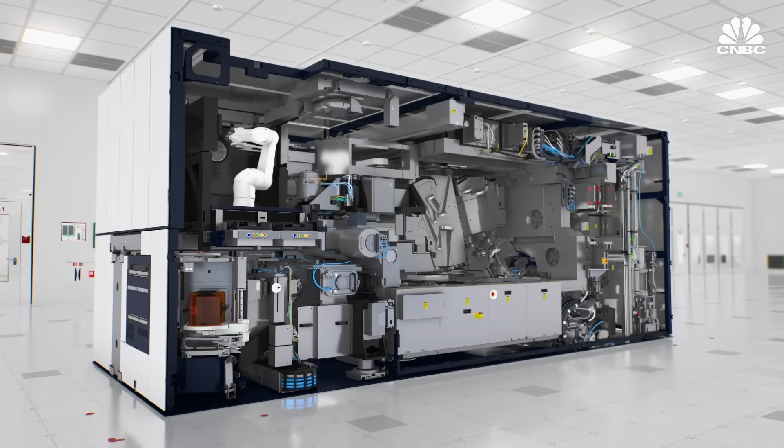ASML has a monopoly on the fabrication of EUV lithography machines, the most advanced type of lithography equipment needed to make every single advanced processor chip that we use today. And this company is one of the most extraordinary organizations in the world.

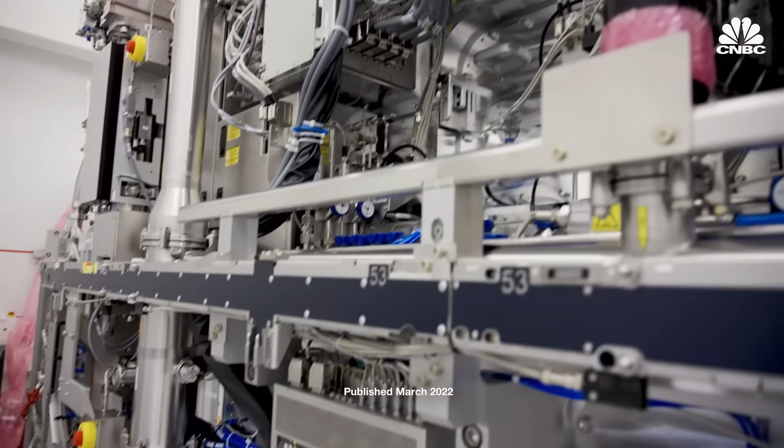At the center of this big factory in the Netherlands, in the midst of a months-long assembly process, there's a revolutionary machine that the whole world has come to rely on. You could see an EUV machine right behind me.

The size of a city bus, but working with atomic-level precision, these EUV lithography machines are the most expensive step in making every advanced microchip that powers the modern digital age—found in data centers, cars, and every single iPhone.

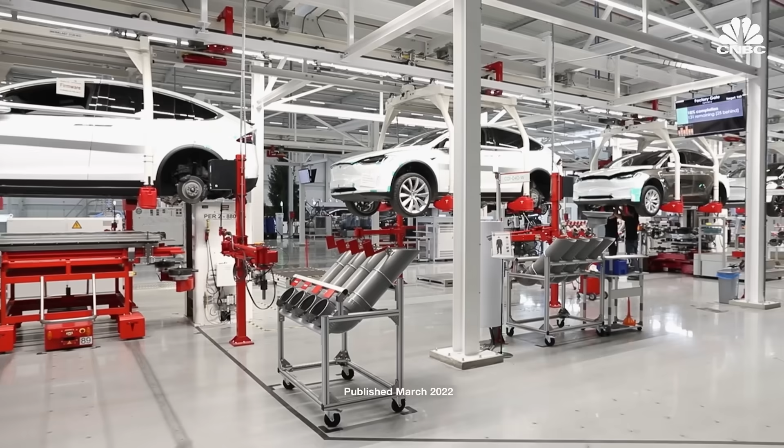We are the only provider on the planet of this critical technology. These machines are the only way to print minuscule designs on these chips. They cost up to $200 million, and they're only made by a single company, Advanced Semiconductor Materials Lithography, or ASML.

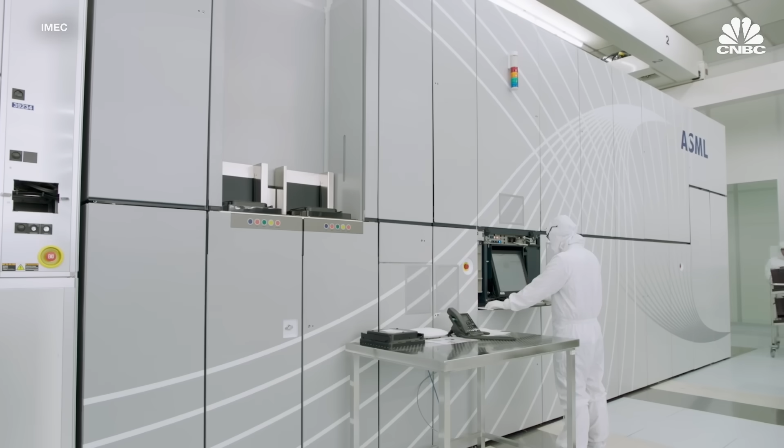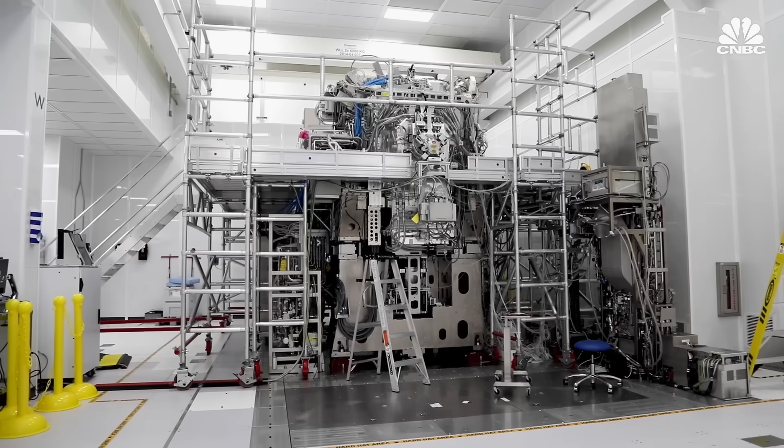Today, ASML has a monopoly on the fabrication of EUV lithography machines, the most advanced type of lithography equipment needed to make every single advanced processor chip that we use today. And this company is one of the most extraordinary organizations in the world. The machines they produce are each among the most complicated devices ever made.

In the midst of a chip shortage that's caused back orders of everything from PS5s to Teslas, the need for ASML has never been higher.

Its stock has skyrocketed since 2018, while its three main customers, chip makers TSMC, Intel, and Samsung, vie to be front of line for ASML's next breakthrough technology.

The price tag for this next machine, which promises to push the boundaries of known physics, is more than $300 million. It's so expensive that most companies cannot afford it.

While the chip wars rage on, we wanted to find out what's really going on inside the quiet company making the machines that print them all.

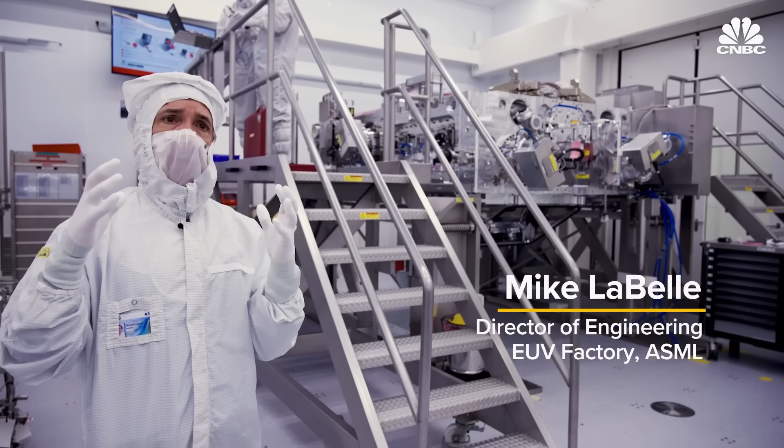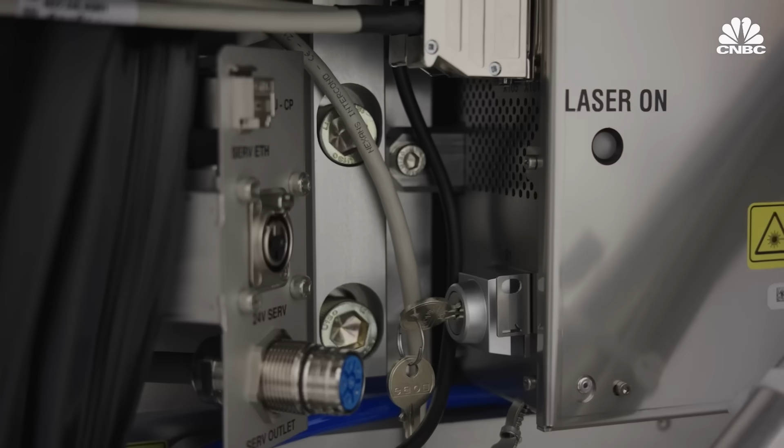This is the optical part of the machine that makes EUV possible. We got a rare tour inside ASML's clean rooms in California and the Netherlands to see how these machines use precision lasers, exploding molten tin, and the smoothest surface in the world to bring our digital age to life.

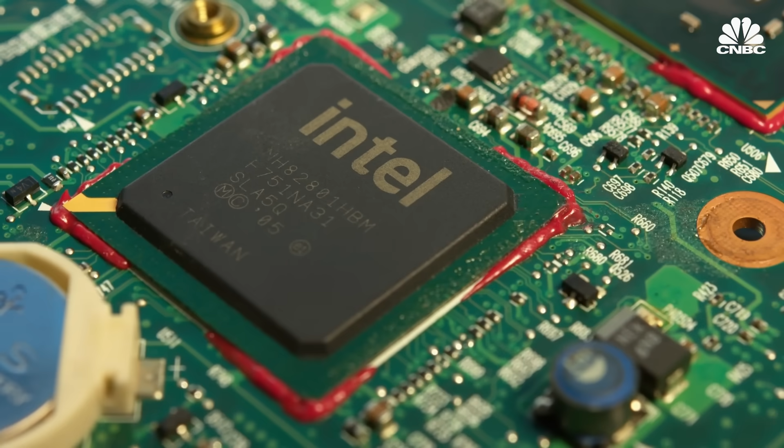ASML's crucial role on the chip-making stage has brought it wild success over the past few years, making it even more valuable today than Intel, one of the biggest chip makers it supplies.

It's double-digit growth every year, and we're not a startup. We have now 32,000 people.

Peter Wennink has been CEO since 2013, but he joined ASML back in 1999, just 15 years after its humble beginnings. It started as a subsidiary of Dutch electronics giant Philips in 1984, conducting research out of a leaky shed next to a Philips office building in Eindhoven in the Netherlands.

They were in financial dire straits, so we had no money. We were poor. And because the problems Philips had were so big, nobody looked at this little outfit out there that was trying to do something crazy, so they neglected us.

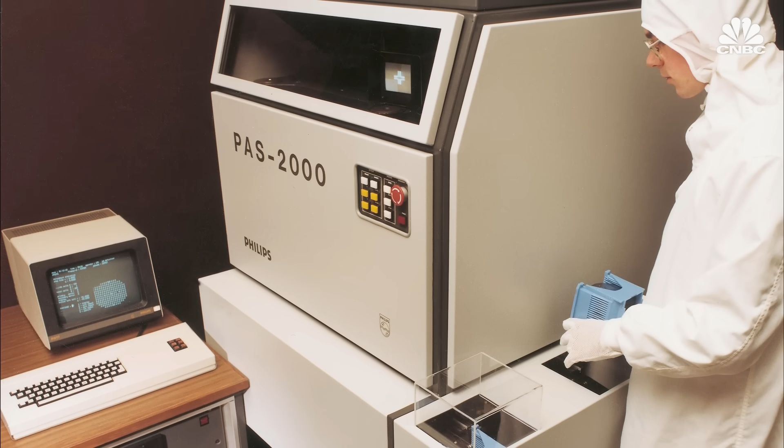Still, in its first year, the company successfully launched a first-of-its-kind machine that used precise rays of light to print tiny designs on silicon to make microchips, a technology known as lithography.

The first lithography tool really looked like a projector. There is basically a reticle which holds the image that you want to project. Then there is an optical system which is going to take this image and project it on the wafer.

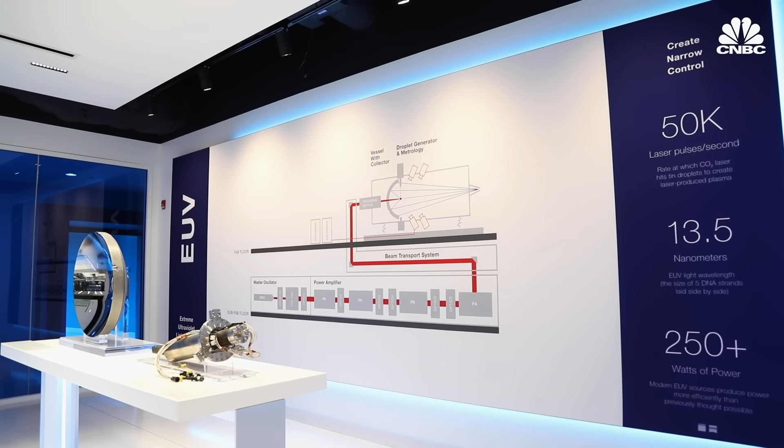Semiconductor lithography was invented in a US military lab, and for a long time, up through the 1980s, the key lithography firms were American, based in New England. Chris Miller of Tufts University is writing a book called The Chip War: The Fight for the World's Most Critical Technology. When the industry was getting ready to jump into the early stages of EUV research, none of the US firms were ready to take the plunge on what would be an expensive and risky proposition, whereas ASML was.

By 1988, ASML had 5 US offices with 84 employees, and a new Dutch office that eventually became its headquarters in Veldhoven, where CNBC took a tour earlier this month.

We're walking through the EUV factory, which is about 50,000 square meters of space with 1,500 employees working in shifts 7 by 24 to produce 100% of the EUV machines shipped worldwide from this facility.

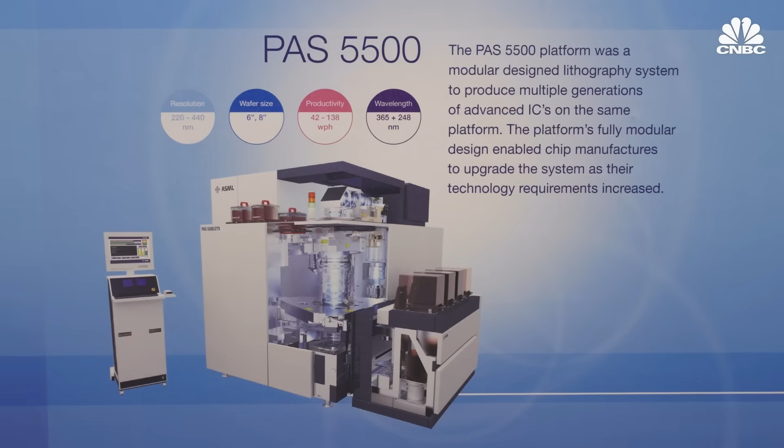With a breakthrough machine, ASML started turning a profit and went public on the Amsterdam and New York Stock Exchange in 1995. By the 2000s, ASML was acquiring California tech companies like Silicon Valley Group and various key suppliers like Cymer in San Diego, where we also got an inside look at the cleanroom where ASML's light source is produced.

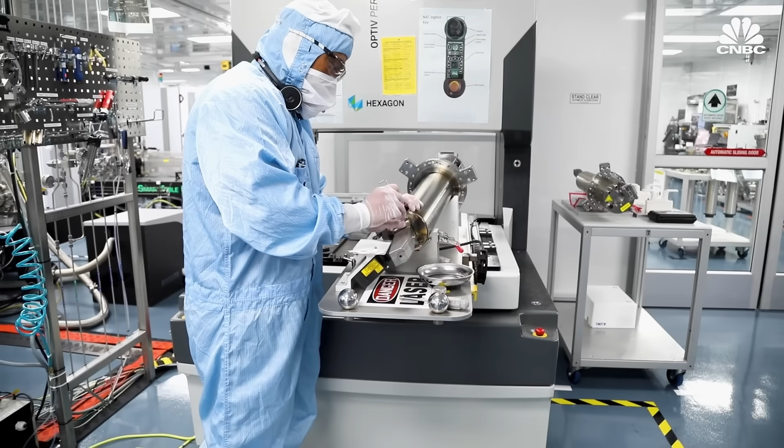So this is actually the nozzle manufacturing area where we build the nozzles. This is the piece where the tin shoots out of. That's what's going to create your EUV.

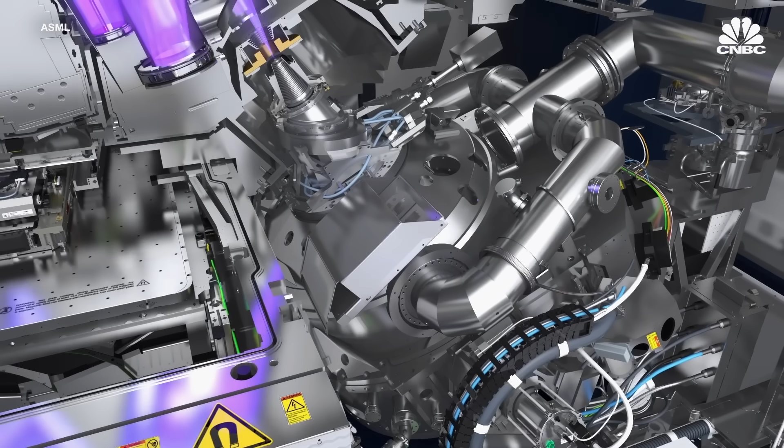EUV refers to extreme ultraviolet, an incredibly short wavelength of light that ASML uses to print smaller, more complex chips. But developing this revolutionary technology was incredibly expensive.

We didn't have the money, so we went out and found partners, which was actually the basis of the way that we built the company. So we were forced to be a system architect and a system integrator.

In 2012, ASML offered about a quarter of its shares to its biggest 3 customers: Intel, Samsung, and Taiwan Semiconductor Manufacturing Co., or TSMC. They had to accelerate the R&D for EUV, and the only way they could do this is to get their largest customers involved.

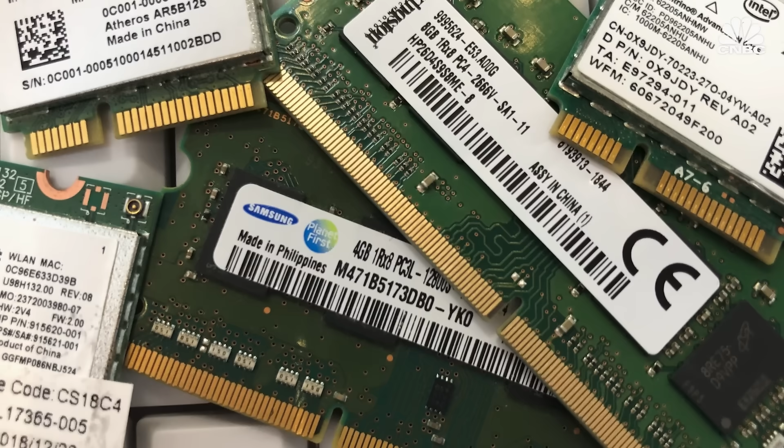And one way you can make your commitment real is to make them a shareholder. ASML is a Dutch company, but it's also a Dutch company that relies very heavily on US components, in particular for its machines, and at this point relies also very heavily on one Taiwanese customer for its sales.

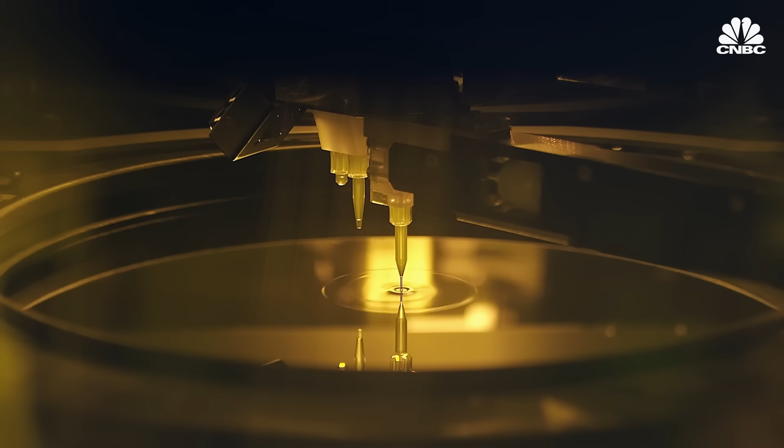TSMC made up nearly 40% of ASML's sales last year. In 2019, the Taiwanese chipmaker was the first to deliver high-volume chips made with EUV, a milestone that's kept it at the head of the pack ever since, its chip technology at least one node ahead of Samsung and Intel.

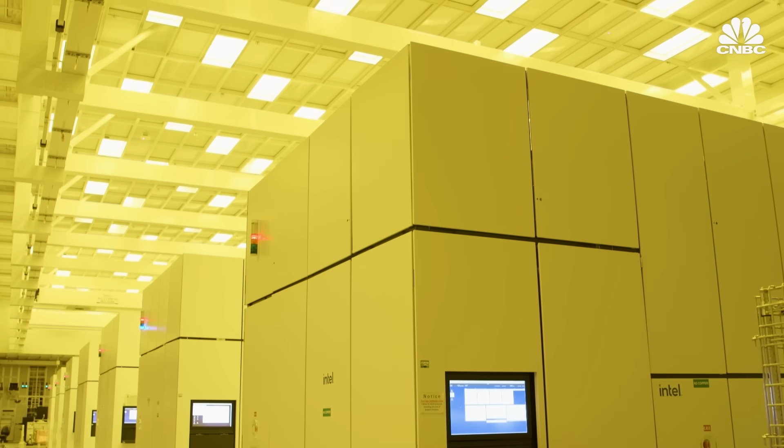And it has been TSMC's customers that have gained a lot of benefit, like AMD, NVIDIA, and others. And yeah, you can argue that this has come at the expense of Intel not executing. Intel is just now producing its first chips with EUV this year, 3 years behind TSMC.

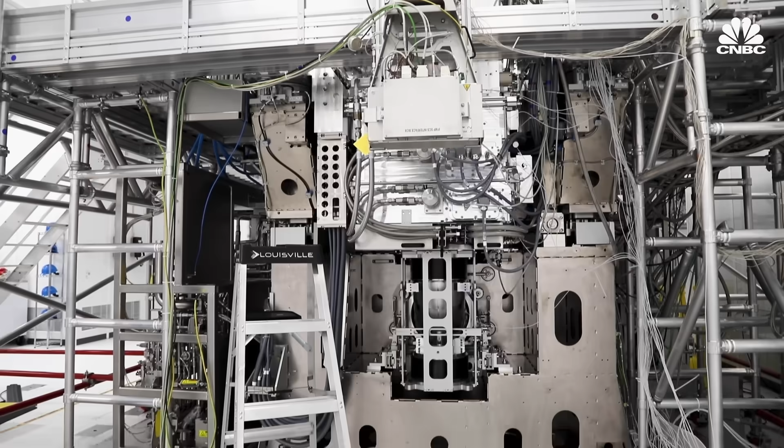But it's made a bold move in hopes of catching up, an early investment to secure the first prototype of ASML's next machine, high numerical aperture.

To understand why the success of a giant like Intel hinges on ASML, let's take a look at how EUV lithography revolutionized chipmaking. When you start breaking down what does it take to make an EUV lithography machine, it's sort of Nobel Prize winning in terms of the engineering involved.

Chips are made from silicon, an abundant element found in rocks and sand that's purified, melted down, then sliced into circular wafers, the surface on which chips are built in a grid formation. Each wafer can have dozens of thin layers, making up billions of transistors that determine what the chips can do.

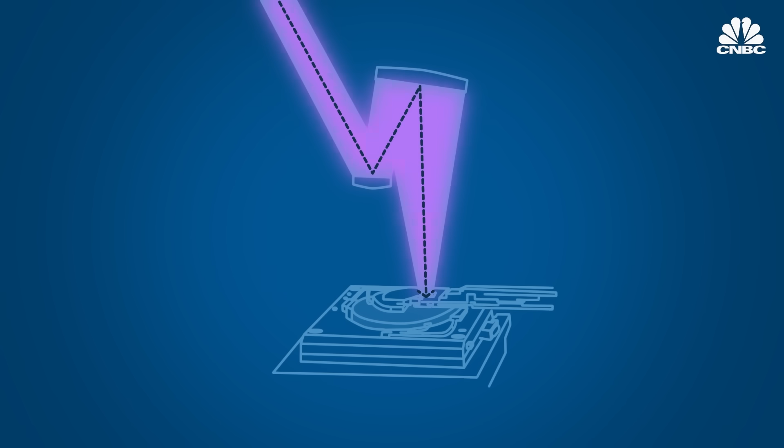These layers are printed using lithography. Extremely precise rays of light are projected through a mask of the chip design. When the light hits the surface of the wafers, which have been coated with photoresist chemicals, it prints the minuscule designs on each layer at extremely high volumes.

If you think of a typical processor chip in an iPhone, for example, it will have over 10 billion transistors on a chip, and Apple will sell 100 million or more iPhones for each model that's rolled out. So you're already talking in numbers that are far bigger than you or I remember how to pronounce.

As the wavelength of the light source in making chips gets narrower and narrower, it gives us the ability to make chips with smaller features, which means the chip is faster, the chip can be smaller, the power consumption of the chip can be lower.

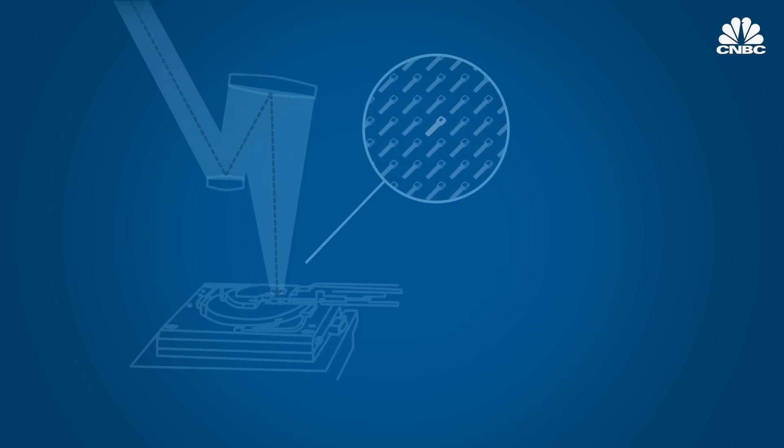The smallest transistors are more than 10,000 times thinner than a human hair. The designs have gotten so small, ASML had to develop new methods of printing at the very edge of known physics. With the help of customer investments and a consortium of scientists, ASML figured out a way to create large amounts of extreme ultraviolet light.

With a wavelength so short it's not only invisible to the human eye, it's absorbed by all natural substances, even air. So the entire process has to happen in a vacuum, a first for lithography.

At 13.5 nanometers, ASML's EUV wavelength is the size of just 5 DNA strands laid side by side. The previous generation machines used deep ultraviolet light, or DUV, with a wavelength of 193 nanometers. The vast majority of ASML's business, 268 of the 309 machines sold in 2021, still use DUV technology, which is used to print the less advanced chips, which are in shortest supply.

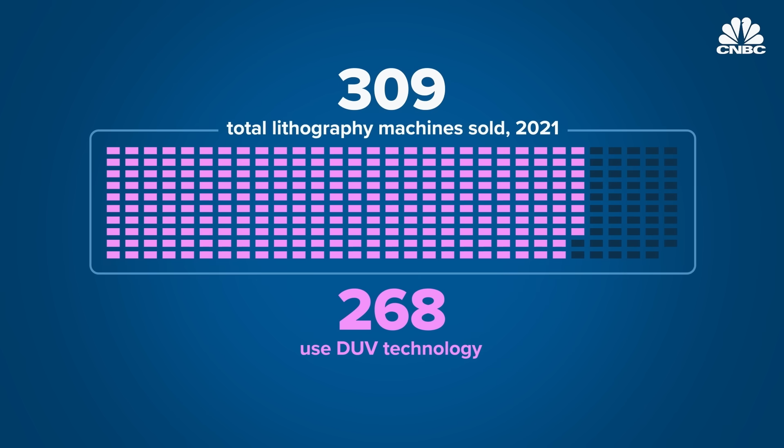DUV is for anything that is low technology, like a toaster or a refrigerator, or even some of the electronics in your car. Today's iPhone 13 is EUV.

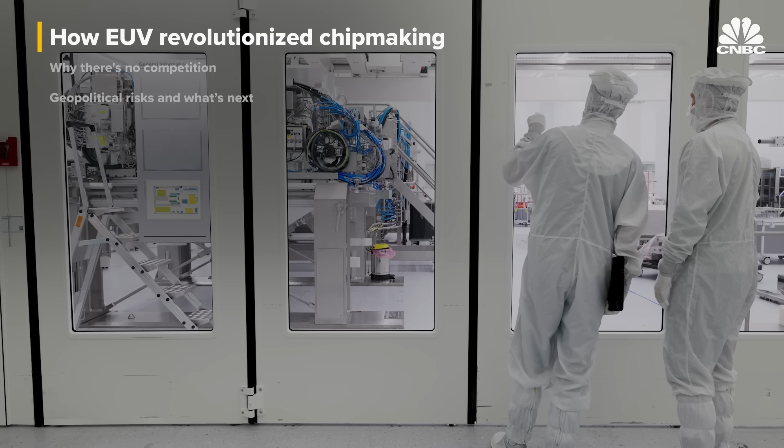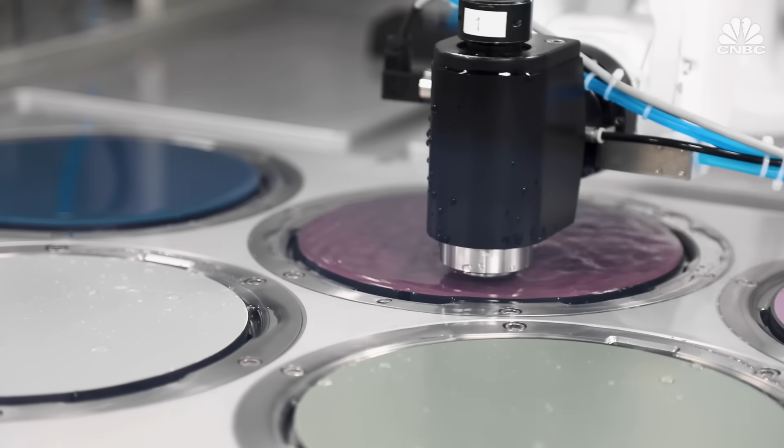Both DUV and EUV lithography is so advanced it requires precision down to the atom. This is an EUV cabin of our clean room, which is 10,000 times cleaner than the outside air. We're wearing these clothes not to protect ourselves from the environment, but to protect the machine from the contamination created by us.

This tiny thread may look like the strand of a spider web, but it's actually molten tin being shot out at a pressure of 4,000 psi, and it's how EUV light is created. This is continuous tin. It never, ever, ever stops.

The tin is streaming through a perfectly calibrated nozzle, which we saw being built in San Diego, at a rate of 50,000 droplets per second. A 30 kilowatt carbon dioxide laser hits each droplet twice, vaporizing them into plasma.

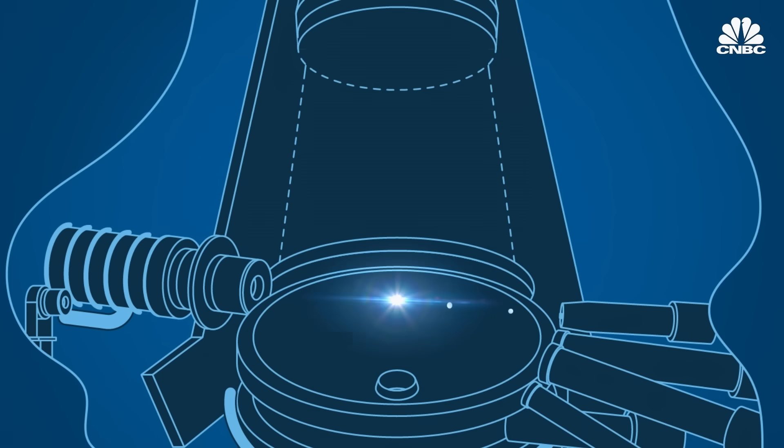These tiny explosions are what emit photons of EUV light. A huge number of tin explosions need to happen because only about 5% of the photons reach the actual wafer. The light particles are so short they get absorbed by lenses, the typical method used to precisely aim light through a lens. So ASML partnered with German optics company Zeiss, which makes the flattest surface in the world.

The flatness is really just incredible. If you took a mirror element that is maybe this big and blew it up to the size of the country that we're in, the biggest bump would only be about 0.1 millimeter across the entire surface of a mirror the size of this country.

EUV light bounces off these groundbreaking Zeiss mirrors until it hits photoresist chemicals on the surface of the silicon wafer to print minuscule designs that make up the chips. The aim needs to be so precise, TSMC says it's equivalent to shining a laser from the moon to hit a coin on the Earth.

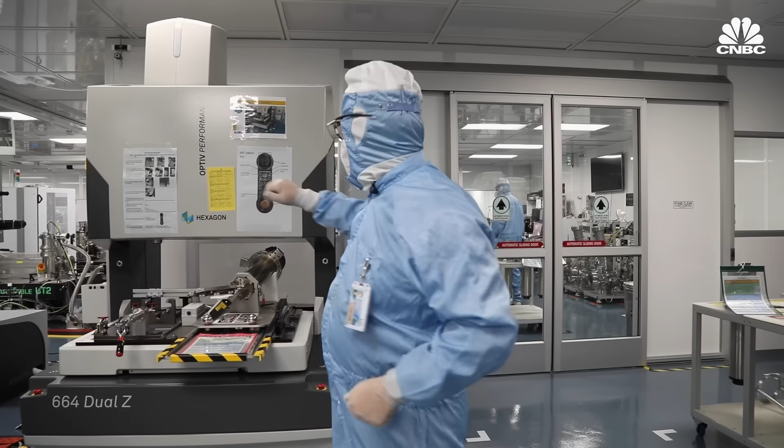So your tin is inside a reservoir here, and then you're firing out this way. Pete Mayall has been running this clean room for 6 years. If any kind of defect particle whatsoever is even on the tip of that capillary, it's a fail. We'll remove it and start all over again.

And the speed and scale at which this has to happen is staggering. ASML says an EUV machine churns out about 3,000 wafers a day. There can be hundreds of chips on a 300mm wafer, and up to 10 billion transistors per chip.

They take extraordinary achievements of engineering and physics, and they're able to replicate these on a mass production scale, at a low enough cost where these machines can be used in chip fabs to churn out thousands and millions of chips for the companies that buy them.

A completed EUV machine is actually made up of 7 different modules, each built at one of ASML's 6 manufacturing sites among its 60 total locations around the world, then shipped to and reassembled in Veldhoven for testing. Then it's disassembled again for shipment, which takes 20 trucks and 3 fully loaded 747s.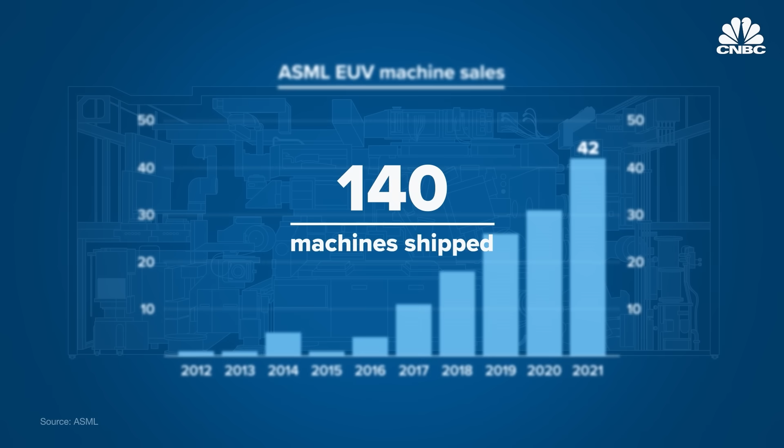In 2021, ASML sold 42 EUV machines, bringing the grand total it's ever shipped to just about 140. With each machine costing up to $200 million, only 5 customers can afford to buy EUV systems: Micron, SK Hynix, Samsung, Intel, and TSMC, the last 3 making up nearly 84% of ASML's business.

It certainly has eliminated a lot of players out of that market. We saw GlobalFoundries, back 5 years ago or more, say that they weren't going to pursue a 7-nanometer chip. The handful of huge customers it does have are furiously adding capacity to try to ease the global chip shortage, which is impacting ASML too.

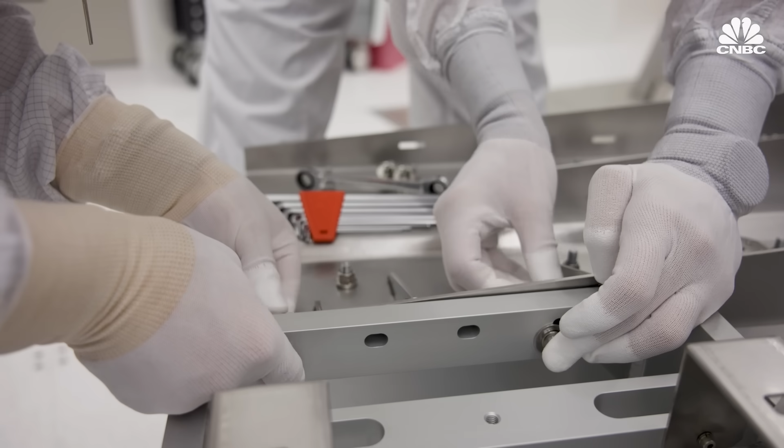We got a lot of messages from our suppliers that said, hey, we might be late in delivering our modules to you guys because we cannot get the chips. And we said, well, if we cannot get the chips, we cannot make the machines to make more chips. So there's a catch-22. We're still managing, keeping our fingers crossed, but it's a daily struggle.

The question is, can ASML keep up with demand? I think the answer is probably yes. Maybe the growth will exceed even their targets.

That's possible, but they're certainly preparing to ramp up production, which is good news if you're worried about a chip shortage. The world needs more chips, so we need to make more machines, which will keep growing in average selling price as long as we can drive the cost per transistor down, which is exactly what we've been doing for the last 38 years, and we will keep doing for the next couple of decades.

Before EUV, chipmakers had 3 companies they could choose from for their photolithography tools: ASML, Nikon, and Canon. Nikon in Japan is still a competitor for DUV, but ASML is the only option for EUV.

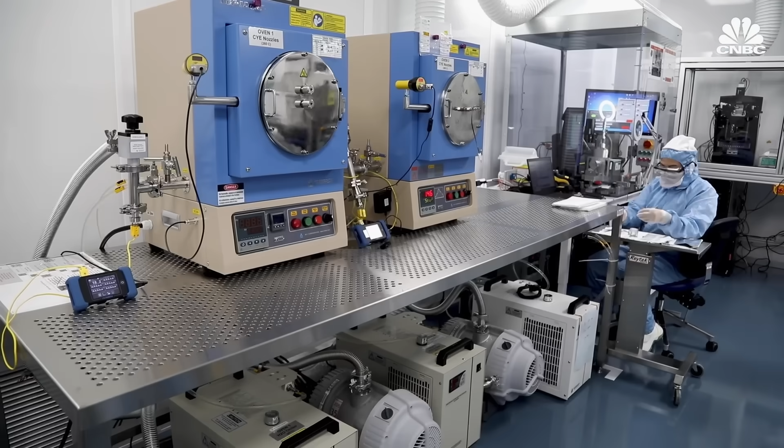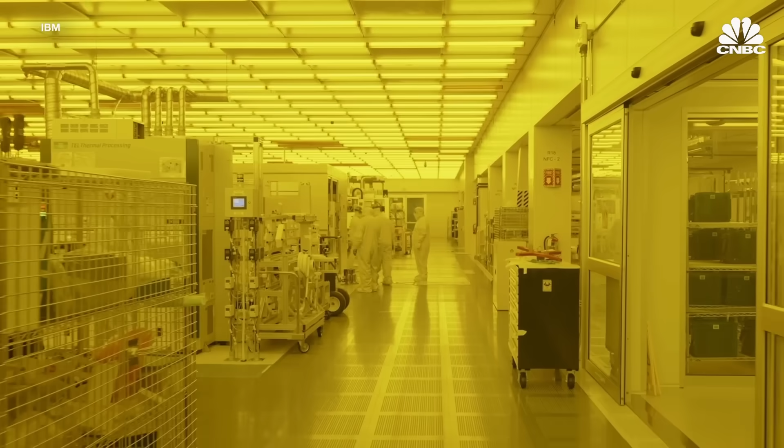Experts say it could take decades for any other company to catch up, not only because of ASML's proprietary tech, but because it's built complex, often exclusive deals with nearly 800 suppliers. We're unique to our customers, like some of our suppliers are unique to us, and those almost symbiotic relationships, some people say, are worse than being married because you cannot divorce.

It takes 10 years to not only get the technology, but then be accepted. So the buyers for semiconductor manufacturing fabs are very risk averse.

One of the ways ASML has insulated itself against supply chain risks is by purchasing some of its suppliers, like Berliner Glass in 2020. A fire broke out there in January, but Wenning says it won't significantly impact system output in 2022. Instead, ASML projects a 20% sales growth this year and an annual revenue growth rate of 11% until the end of the decade.

It's actually driven by you. You're asking for more solutions that will help you to have a better life, to make your life easier, your life more productive. We're changing into a sensing world.

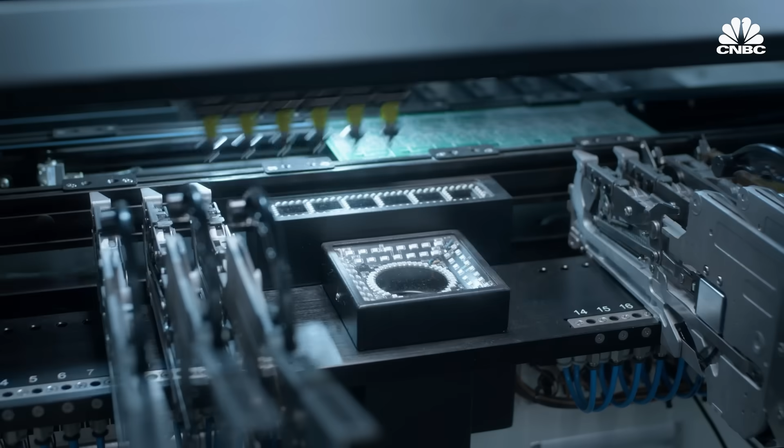There are sensors everywhere. They're in your car, they're in your fridge, they're in your PC, they're everywhere, sensors. They need semiconductors.

All of the world's most advanced semiconductors are made in Asia by two of ASML's biggest customers, TSMC and Samsung. But the chip shortage has raised concerns about overseas dependency.

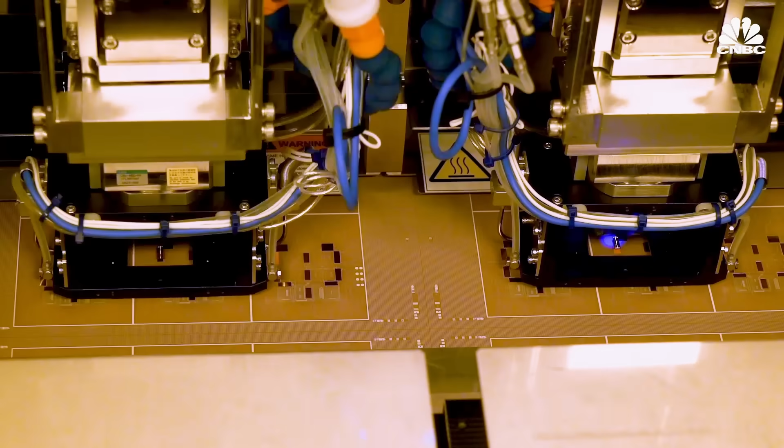This is why you see all these initiatives around the globe, the US CHIPS Act, the EU CHIPS Act, the Korean CHIPS Act, the Japanese CHIPS Act, the Chinese CHIPS Act. It's now a very strategic commodity.

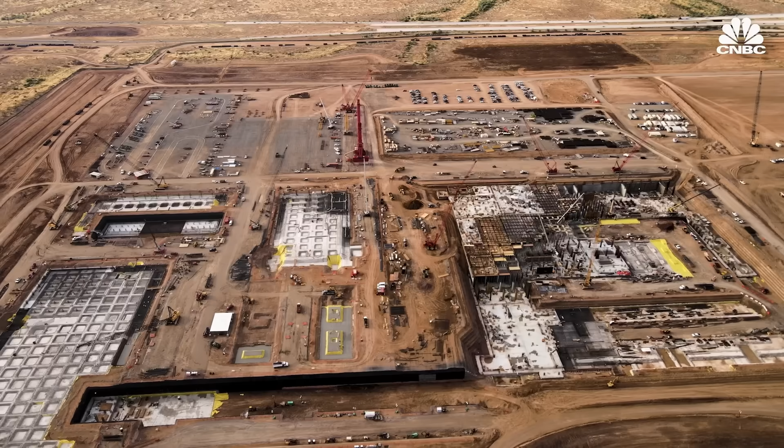Intel just announced a $20 billion chip fab in Ohio, and it's also building one in Arizona, just down the road from a massive new fab where TSMC will make advanced chips in the US for the first time, and Samsung is building a $17 billion fab in Texas.

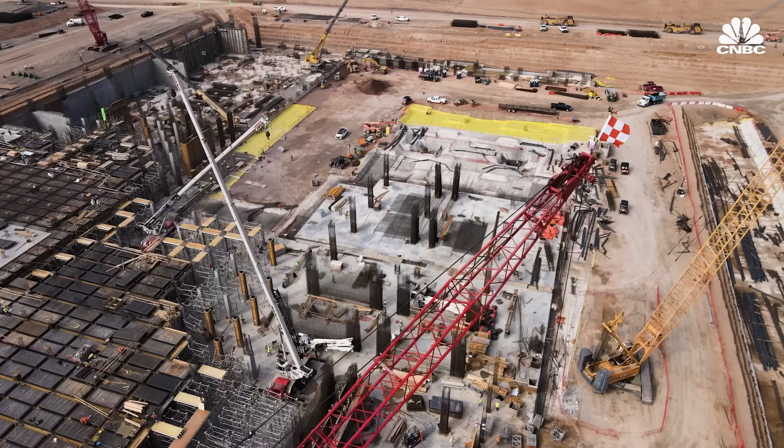All this came after President Joe Biden signed the CHIPS Act, with $52 billion in subsidies for chip companies to manufacture on US soil. It means that we need to ship our machines sooner, earlier, and at higher volume. So it means we need to hire more people in the US. It's talent, it's people. I think that's where the biggest challenge will be.

But this movement toward domestic production has another side that poses a challenge for ASML: a desire to stop sharing chip-making technology with China. China has wanted to get into that race, but there's been politically generated reasons why China has not had access to the same type of technology as other companies.

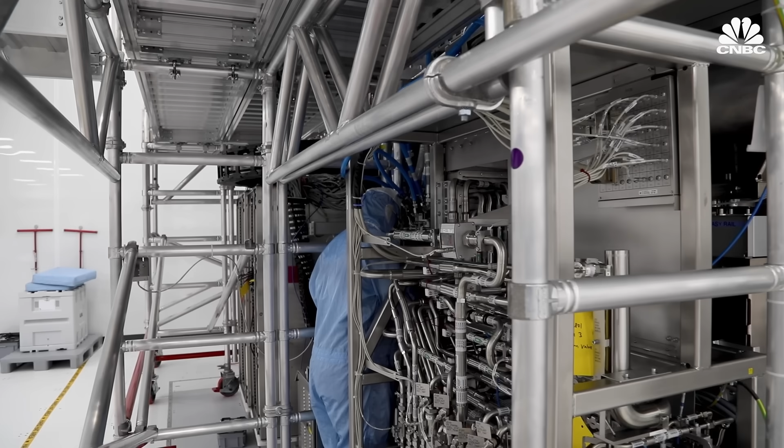As far back as 2018, the Trump administration reportedly pressed ASML not to sell EUV systems to China. ASML still hasn't sold a single EUV machine to China. 42 countries around the globe have agreed to put export control measures on it because it's so critical. So it's not our choice, it's the choice of governments.

ASML also refurbishes older lithography systems and sends many of those to China, more recent DUV machines all the way back to its early systems from the 90s. 96% of all the machines we ever sold, we ever shipped, are still working.

There's a lot of debate about whether selling additional DUV equipment to China is also a national security risk by letting China increase its ability to manufacture close to cutting-edge semiconductors. And so I think there's some chance that in the coming years, there are new restrictions imposed on ASML's ability to sell DUV equipment to China as well. If export controls were expanded to include DUV machines, it could greatly impact ASML's bottom line.

This is where the biggest demand is. This is where the exponential curve is. So, trust me, we need every manufacturing capability on the planet, whether it's in Korea or in China, to just keep adding capacity. Let's go look at a big boy.

And then there's the question of whether demand for the most advanced chips will remain high enough to support continued development of ASML's next generation EUV machine, High-NA. This is the machine Intel announced it'll have first by 2025, and ASML has already sold 4 other units. This is the EXE5000, so this is what we'll be testing for High-NA. This will be what makes our next generations even better.

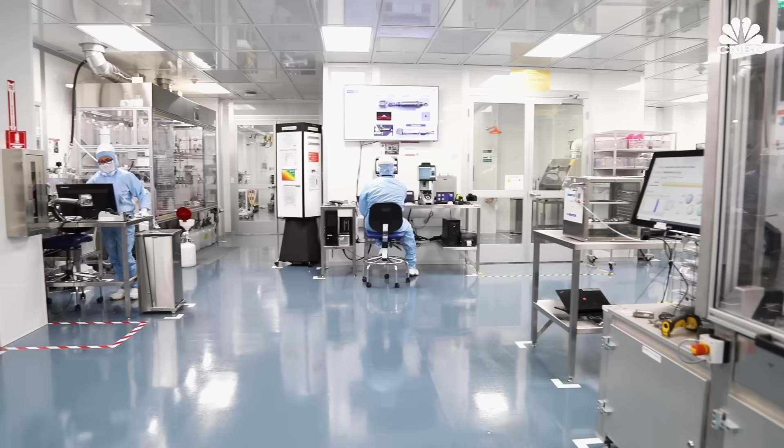Then it's all about execution. And we will keep shrinking the cost per transistor, and we will provide the world with ever more powerful semiconductors. That's not going to stop.

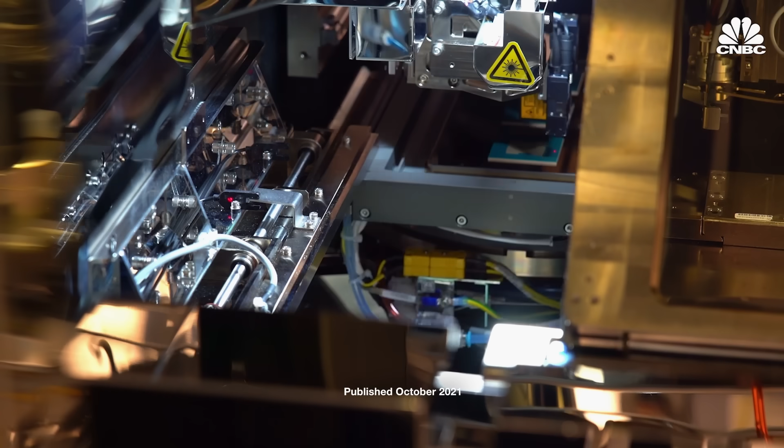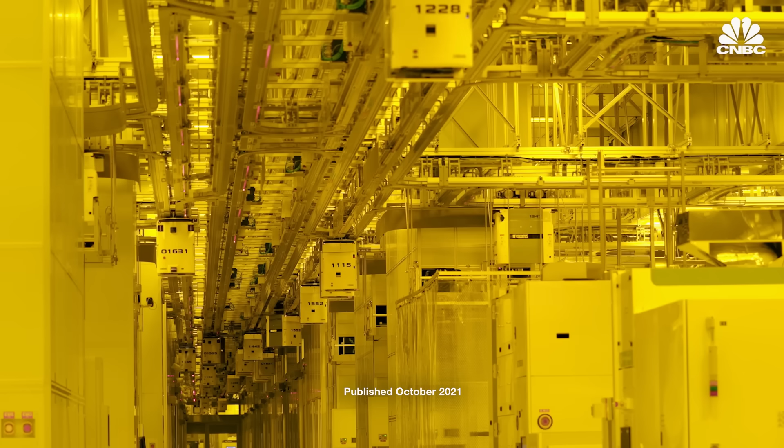Chips are in everything, and they've been in short supply since just a few months into the pandemic last year. That's why it's been hard to buy everything from cars to PS5s. Turns out one company makes 24% of all the world's chips and more than 90% of the most advanced ones, the smallest, fastest chips used in today's iPhones, supercomputers, and automotive AI. Heck, we even have product that's landed on the last Mars launch that are taking pictures of Mars.

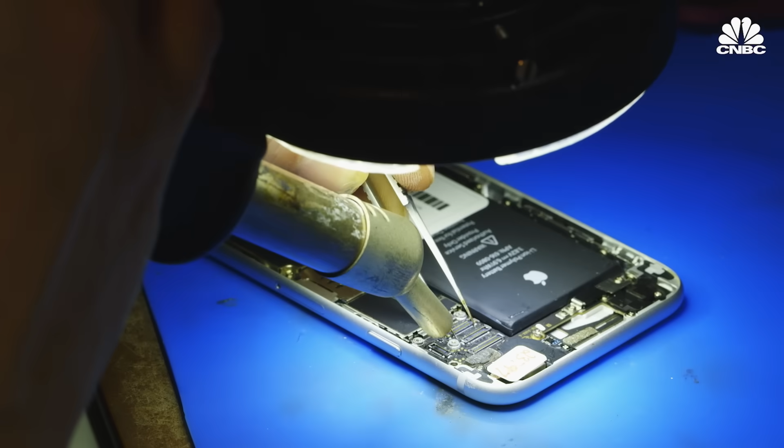Taiwan Semiconductor Manufacturing Company, or TSMC, is not a household name, but it's quietly making chips for every new iPhone, US fighter jets, the highest-end processors, you name it. And now it's investing $100 billion over 3 years to ramp up production amid the shortage. The combined output of what we're doing is in excess of 12 million wafers a year.

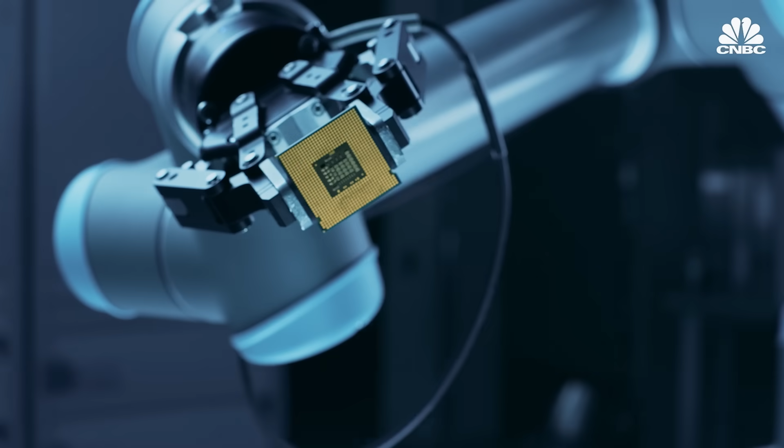But the world's massive reliance on TSMC may also leave the global chip supply vulnerable to earthquakes, drought, and geopolitical tensions with China. It's become almost a monopoly at the leading edge, and all of those manufacturing operations, for the most part, are out of Taiwan, Hsinchu. That becomes a matter of national importance for the United States, but not only the United States, but the Western world.

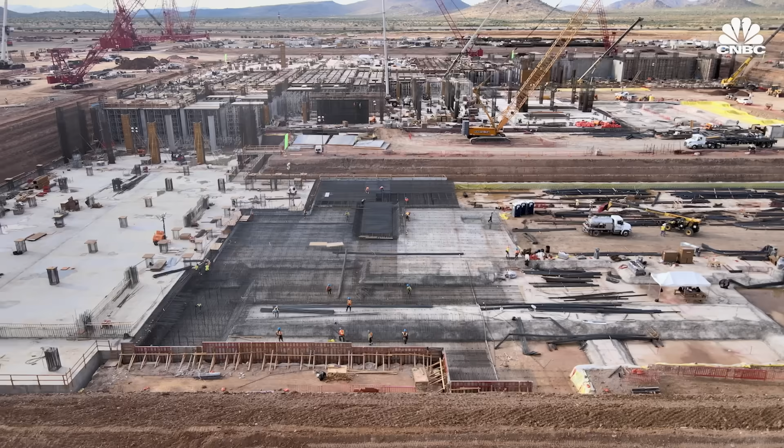TSMC almost always keeps its production sites closed to US video crews, until now. The total floor space for this fab is around 2.3 million square foot.

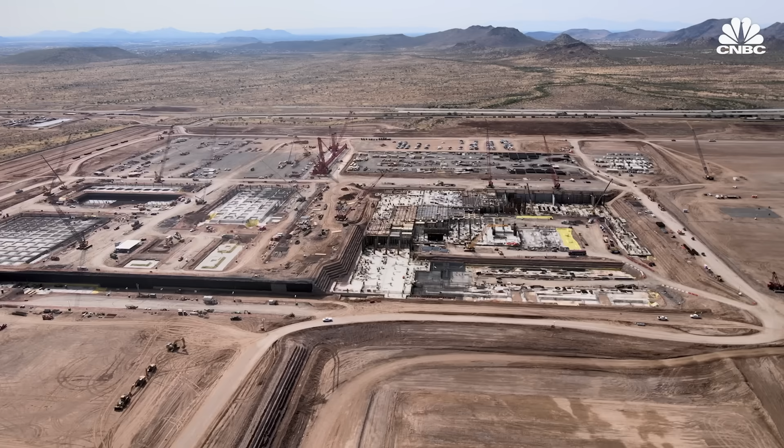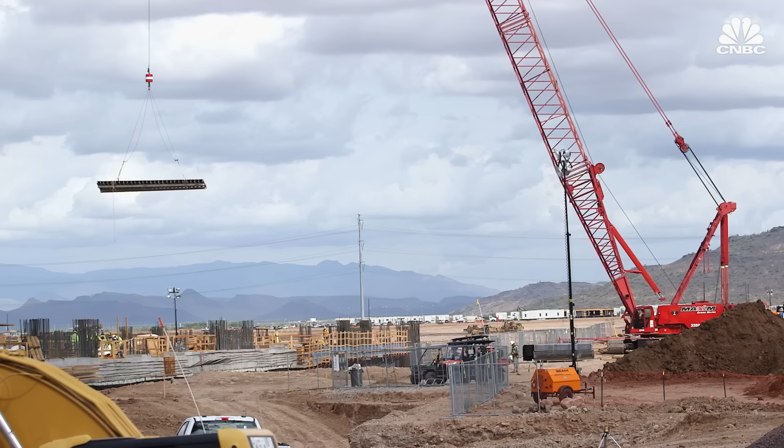The US was the birthplace of advanced silicon, but for decades now, it's been losing market share to Asia, where 75% of chip production happens now. TSMC is now bringing the world's most advanced chip making back to the US, with a $12 billion fabrication plant, or fab, in the middle of the Arizona desert. It's going to be, when it gets introduced to production in 2024, the most advanced technology manufactured in the United States. We got an exclusive tour of the fab site in northern Phoenix to get the truth about the secretive Taiwanese company and why the world's largest contract chip maker is bringing bleeding-edge chip manufacturing back to US soil.

When Morris Chang first proposed the idea for TSMC in the mid-'80s, investors were skeptical. Born in China and educated at Harvard, MIT, and Stanford, Chang moved to Taiwan after 25 years at Texas Instruments. There, the government asked him to create a Taiwanese semiconductor company that would become a world leader. His idea? Focus only on manufacturing, what's known now as a pure-play foundry. When you're just focused on one thing, you do one thing really well.

Rick Cassidy is TSMC's top executive in the US. He's been with the company for 23 years. The slice we spun out was foundry, and that's what we do. And we put all of our resources into doing that one thing.

Chang bet big on a need that didn't exist in the 80s. When he founded TSMC in 1987, giants like Intel and Texas Instruments took pride in designing and making their own chips. A legendary saying in the industry back then was, 'Real men have fabs.' When Morris went out to get funding, he went to many named companies, and they told him, 'Morris, your idea won't get off the ground. If you get it off the ground, it can't scale.'

But as chips got more complex, making them became an enormous undertaking. Building a fab today takes at least 2 years and $10 billion. It's become nearly impossible for even the biggest chip companies, Intel, Nvidia, Broadcom, Qualcomm, AMD, to do it all and keep up with the most advanced tech.

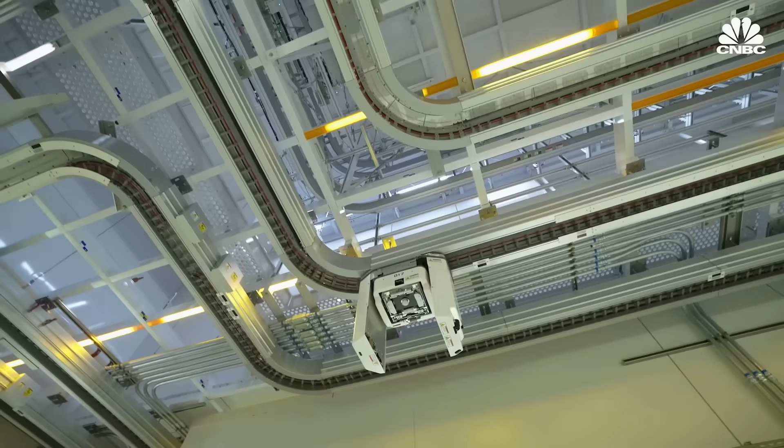Intel, for example, still designs and makes its own chips, but it's fallen behind Samsung and TSMC in recent years, even relying on TSMC to make some of its chips. So if you were a smart designer, you didn't have to have billions of dollars in a fab behind you for the first time with the emergence of TSMC.

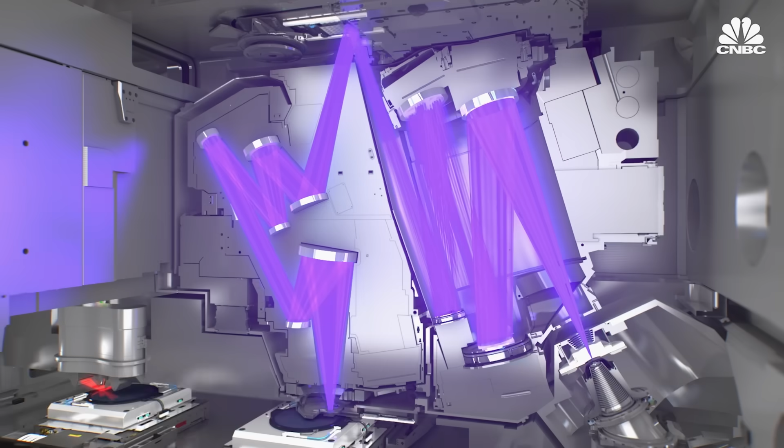Now, each major step of chip making is often handled by a separate company. Some, like ARM and MIPS, focus on IP and architecture, providing the core building blocks to design chips. Then there's electronic design automation, EDA companies like Cadence and Synopsys that write the software used to design chips. Only one company, ASML, makes the $180 million extreme ultraviolet light machines required to etch designs into the most advanced chips. And then, of course, there are the wildly successful fabless companies designing the chips. Think Apple, Qualcomm, Nvidia, and many more.

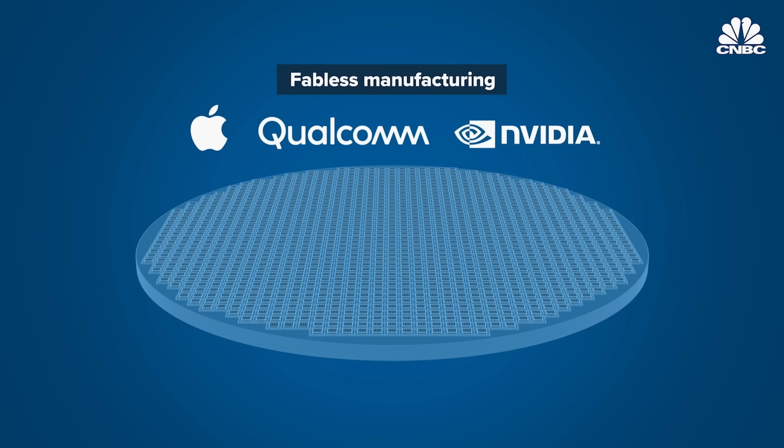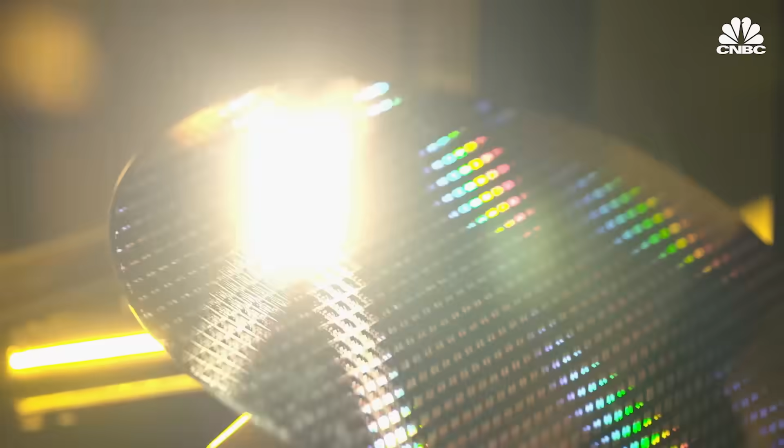As these fabless companies took off, TSMC found itself on a flywheel, making more and more of the world's chips. And this has allowed TSMC to not only catch up, but in my opinion, surpass Intel to become the world's greatest manufacturing technology on the planet, and responsible for becoming one of the top 10 most valuable companies in terms of market cap in the globe.

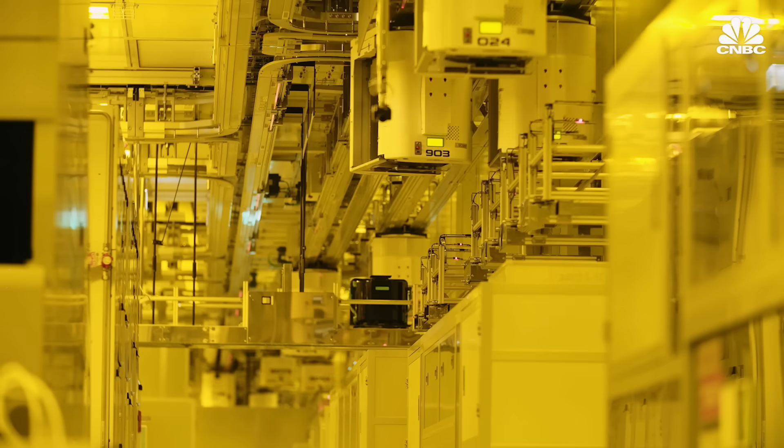TSMC was first listed on the Taiwan Stock Exchange in 1994. In 1997, it became the first Taiwan company listed on the New York Stock Exchange. By the 2000s, it had caught up with the 20 or so other companies making the most advanced chips at the time. As the tech kept advancing, more and more fell behind, until today, only 2 manufacturers remain that can make the most advanced 5nm chips, TSMC and Samsung.

In 2014, Apple started relying on TSMC to make its A-series chips for the iPhone as it moved away from reliance on Samsung, a direct competitor in mobile phones. Today, there's a TSMC chip inside every iPhone on the market, and Apple has moved away from Intel too, now relying on TSMC to make the chips inside most Macs.

But they remain sort of in the background. So, Apple gets all the accolades when a new phone comes out. We let our products speak for themselves. Their success brings all the business that we could ever hope for.

As to why TSMC hasn't allowed US media into its sites before now. Is part of the secrecy have to do with IP? Sure, because the IP protection is very important in this industry, not only for TSMC, but also for the other companies in the industry.

In 2018, at age 86, Chang retired as chairman of TSMC. His radical, pure-play foundry idea continues to pay off. With the opening of a new fab in Taiwan next year, TSMC is in a race with Samsung to make the world's first 3nm chips, with Intel planning to get there by 2025.

Along with cutting-edge 3 and 5nm, TSMC also makes far larger chips for everything from cars to coffee makers. To understand the different kinds of chips and why nanometers matter, let's look at how they're made.

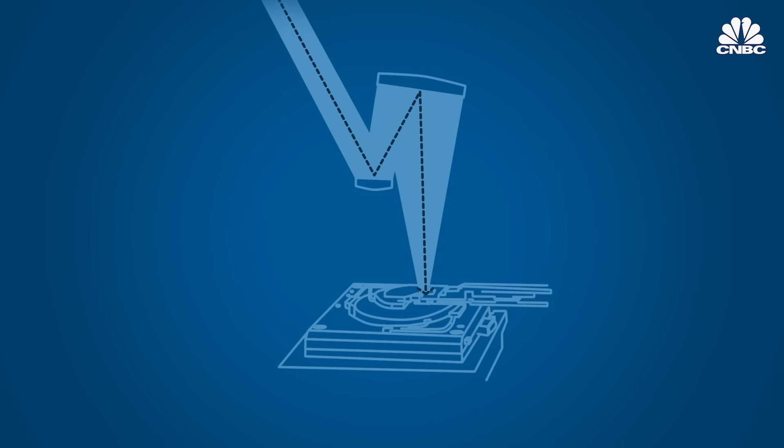The minuscule circuitry is printed on each layer using lithography, extremely precise rays of light. The smaller the width of the transistor gate, 5nm, 3nm, the more processing power can fit in a given space, with less power needed. The smallest transistors are more than 10,000 times thinner than a human hair.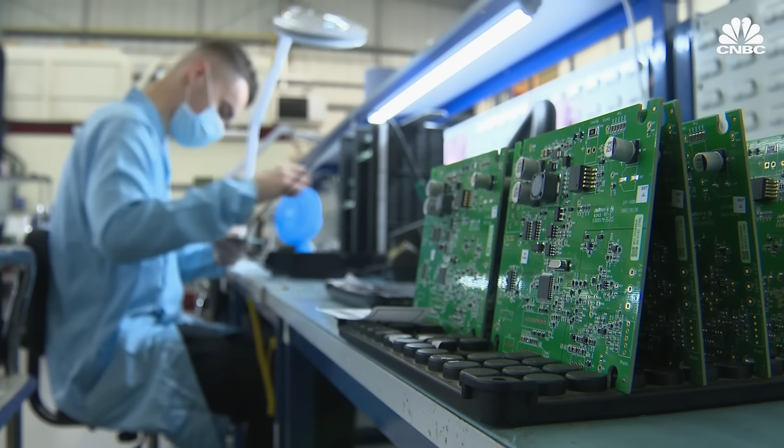Most of the chips are probably about the size, a large one, of my thumbnail. On there you might have something like 50 billion plus transistors, and they all have to work. These are parts that are going to be used in lots of different places, CPUs, GPUs, IPUs, etc. They'll be used in smartphones.

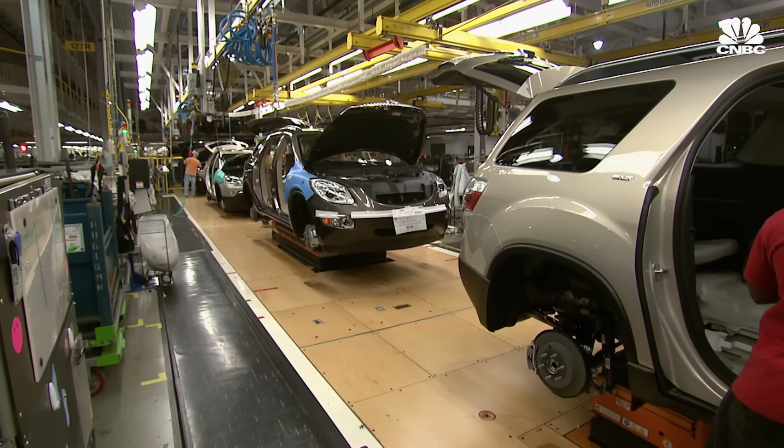Bigger chips are used in most household devices, things like a TV remote or electric toothbrush. Cars often use less advanced 28 to 40nm chips. And all types of chips have been impacted by the shortage. Car makers like GM and Toyota have paused production at some plants. And Apple is cutting its 2021 production targets for the iPhone 13, with orders for the 13 Pro Max delayed by more than a month.

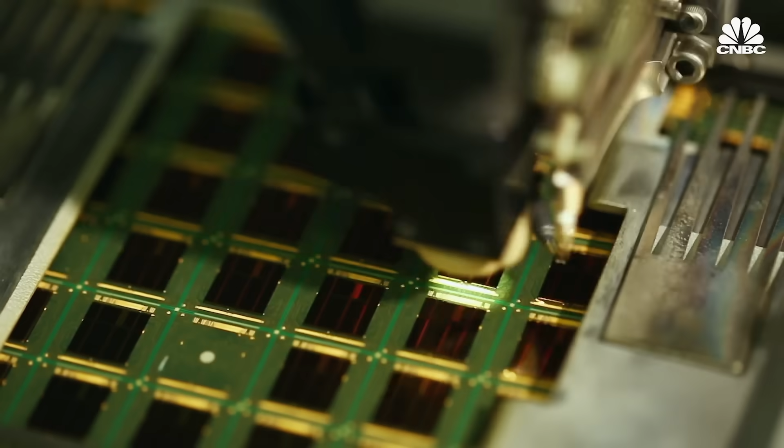Right now, no fab in the US can make 5nm chips, but TSMC is changing that. From the F-35 Strike Fighter to these consumer products, their customer base is wide.

500 plus companies are their customers in the United States, and so as a byproduct of that, we knew they were going to need to be in the United States at some point. Chris Camacho of the Greater Phoenix Economic Council got to visit TSMC's fabs in Taiwan during the 5 years he was helping negotiate the deal that brought the project to Arizona.

The robotics, the automation, the mechanization occurring before your eyes. You can see how these things not only are so capital intensive, but their output is so significant. TSMC is 6 months into building this massive 5nm fab outside Phoenix that will pump out 20,000 wafers per month starting in 2024. The chips from the wafers will end up in iPhones, high-end processors, and much more. Arizona project leader Tony Chen has led 17 other fab construction projects in his 23 years with TSMC.

Actually, this project is designed for 5nm fab. It's a copy from the fab we have in Taiwan.

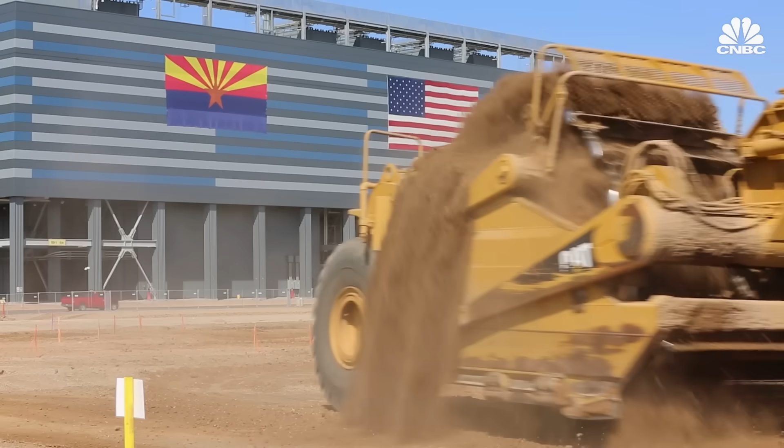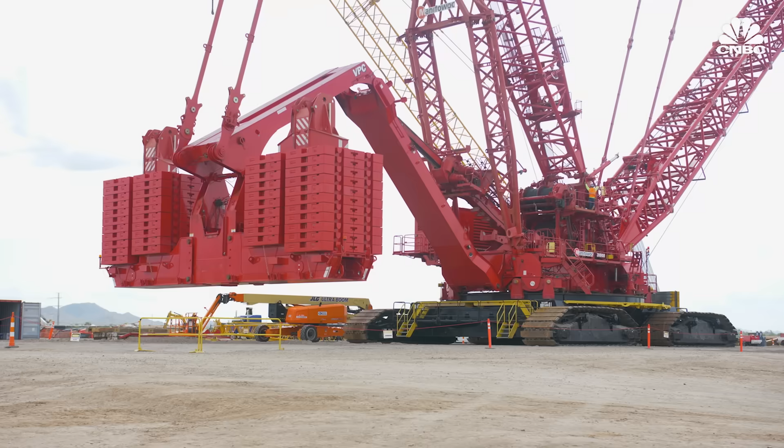Just down the road, Intel is in the midst of building 2 new fabs, spending $20 billion. These massive buildings, used to make minuscule chips, have brought some of the world's largest equipment to Arizona. This is the biggest crane that Manitowoc makes. There's only 2 of them in existence, and it's a 2,300-ton crane.

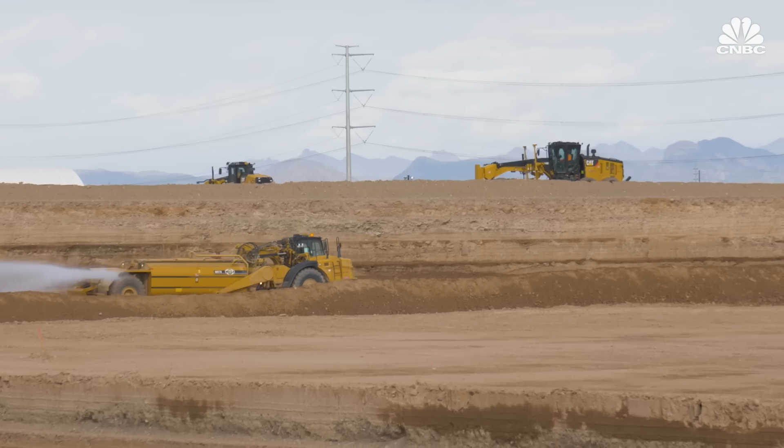Since we've started, our dirt contractor has moved over 3,731,000 cubic yards of dirt. We've also used over 260 million gallons of water. Indeed, building a fab and making chips takes an incredible amount of water.

Something that's not easy to find in the middle of the desert. Arizona's biggest water source is groundwater, but deep wells at big farms are using up groundwater faster than it's naturally replenished. We do need around 4.7 million gallons per day of water to support the production.

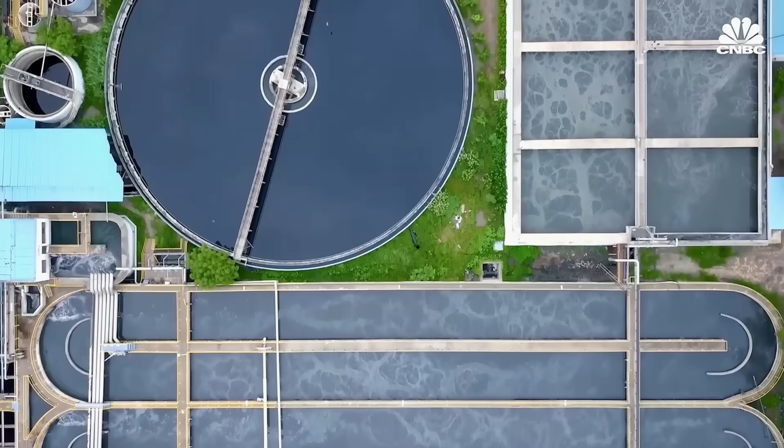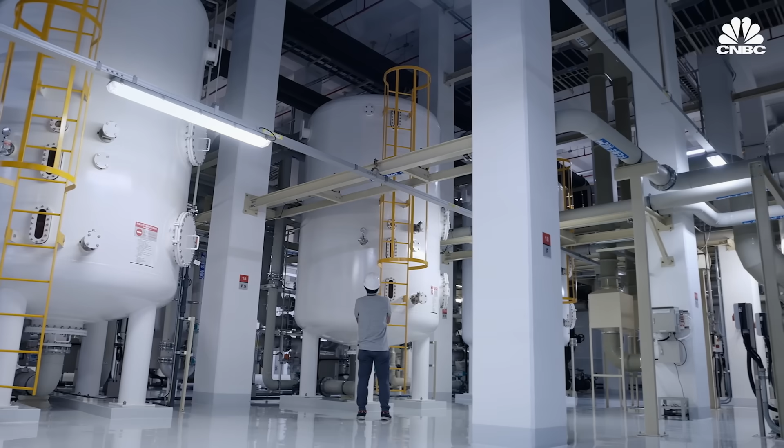TSMC is no stranger to water shortages. Taiwan is facing its worst drought in 56 years, something that TSMC says has not impacted production. In Arizona, TSMC says an on-site water treatment center will recycle up to 90% of water used at the fab. And then ultimately that water will be re-injected into the aquifer in partnership with the City of Phoenix after reverse osmosis and other technology solutions are provided.

Another challenge of producing the most advanced chips stateside: the current specialists are all in Asia. TSMC's best engineers right now are in Taiwan. They're likely going to stay in Taiwan. The most cutting-edge R&D is going to be done in Taiwan.

To solve this, recruiter Roxana Vega says TSMC is bringing over some of its top experts from Taiwan. They're seen as subject matter experts in what they do in our fabs over there, and it'll be a temporary assignment, depending, 2 maybe 3 years.

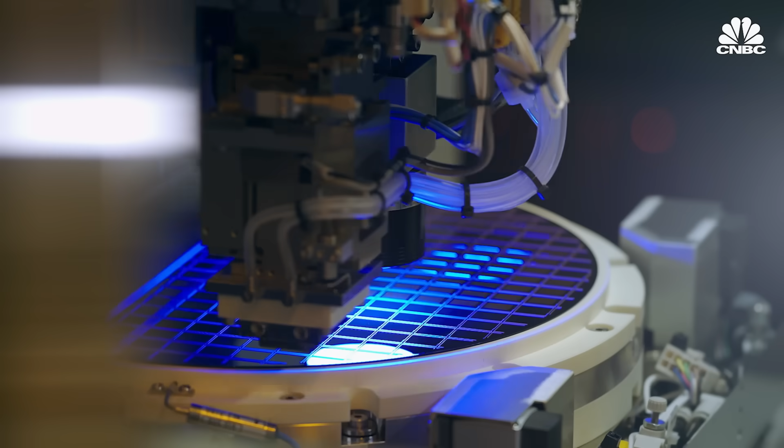TSMC has already sent some 300 new U.S. hires to Taiwan for 12 to 18 months to get up to speed. Their opportunity to train in our 5nm gigafab in Taiwan gives them that insight of how immense and how state-of-the-art our tools, machinery, and everything is going to be here in Arizona.

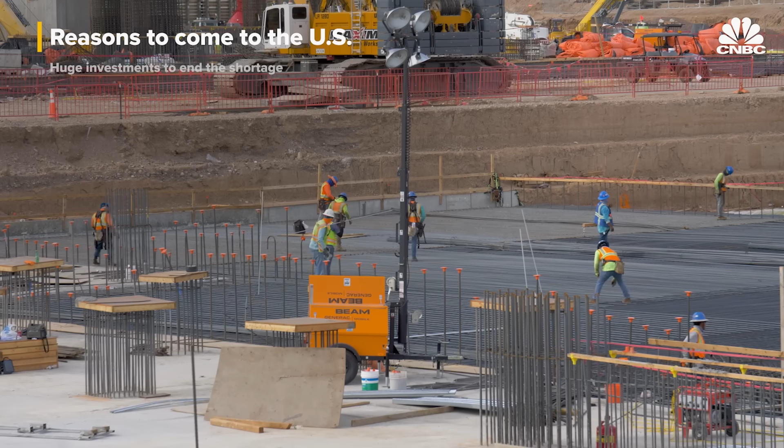Taiwan is not very good when it comes to analog semiconductor design, and by moving to the United States, you'd be able to tap into a much larger number of analog designers. This diversification is a key reason for TSMC to bring advanced manufacturing to the U.S.

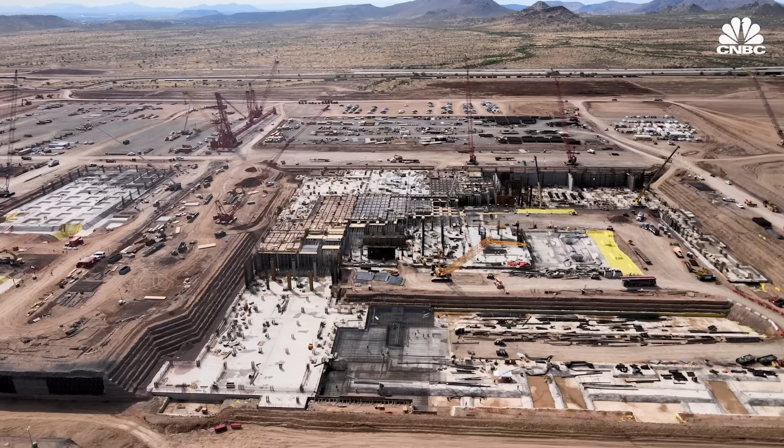And then there's proximity to its huge, fabless customers based in the U.S., like Apple, NVIDIA, and Qualcomm. If you want more capacity, you have to build more fabs, and that's one of the reasons that we're moving to the U.S. Our customers want us in the U.S. The U.S. government wants us here.

Over 60% of their customer base is still U.S. companies. So some of these companies, like Apple, had hinted that they want their supplier to be closer to home, just in case. TSMC has 12 fabs, almost all of them in Taiwan and China. They account for nearly 54% of all global foundry revenue.

And this heavy reliance on TSMC in Taiwan leaves the world vulnerable to potential slowdowns from earthquakes, the current drought there, or the geopolitical tensions swirling around the US, China, and Taiwan. But some refer to TSMC as Taiwan's silicon shield. The silicon shield is TSMC is extremely important, and I think people depend on us.

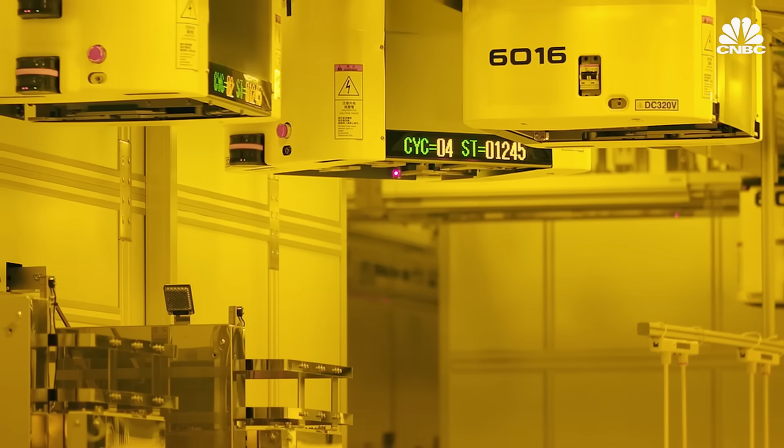The media paints a very bleak picture of this situation, but I'm actually much more optimistic, in part because of this idea, the semiconductor shield. China, as of right now, needs them for their leading edge manufacturing. The U.S. also depends heavily on the chips coming out of Taiwan, a key reason the government worked hard to convince TSMC to bring its tech here.

We're not going to have to worry about geopolitical conflict. We're not going to have to worry about another major pandemic. We will have these kind of manufacturing capacities on U.S. soil.

Today, only 12% of the world's semiconductors are made in the U.S. That's down from 37% in 1990. Back in the days of Bell Labs and the early days of Silicon Valley, we were probably at 100%.

Both state and federal officials are eager to entice TSMC to bring advanced silicon back to the country where it first took off. The state of Arizona has a number of programs, including the Qualified Facilities Tax Credit and the Quality Jobs Tax Credit. That's really an incentive to help lower the cost of operations. In addition, the City of Phoenix put together a $200 million infrastructure package that helps TSMC access water and additional infrastructure needed.

The Biden administration has proposed $52 billion in subsidies for chip companies like TSMC to manufacture on U.S. soil. It's been nicknamed the CHIPS Act. This is infrastructure. So look, we need to build the infrastructure of today, not repair the one of yesterday.

And things like the CHIPS Act are absolutely critical for the success of our country, not only to compete, but to recruit these kind of firms to operate in the U.S. Otherwise, we're going to be importing chips for the rest of our lifetime.

Over the last 20, 30, 40 years, we've slowly slipped in that manufacturing element, especially as we've seen decreasing costs in other countries. It's somewhere between 20 to 25% cheaper for American firms to produce their semiconductors outside of the United States.